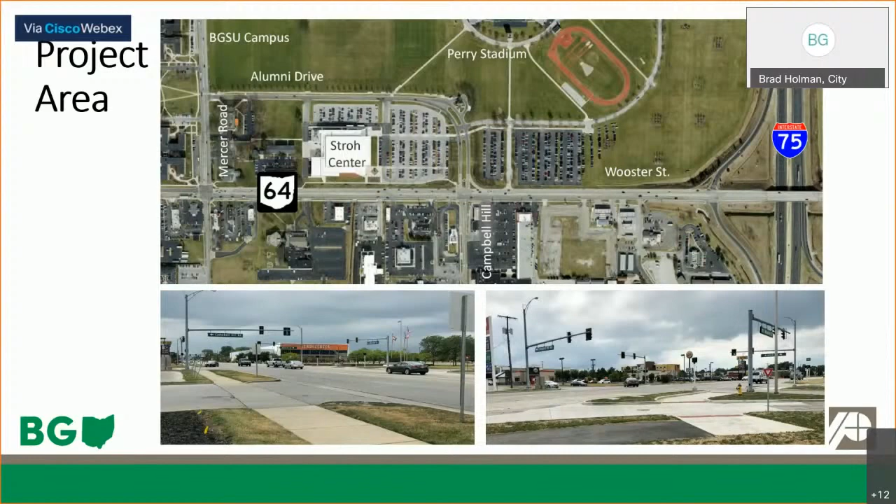This is a project overview. This is actually the third phase of work originating from a 2015 Wooster Street corridor study, which planned to create a safer corridor with improved pedestrian connectivity, safer vehicular access management, improved decorative lighting, and landscaping improvements. It's really the front porch enhancement concept that the City of Bowling Green and BGSU have been talking about for about 5 years. The pedestrian hybrid beacon near the Stroh Center and the I-75 ramp roundabouts were the first and second phases. In this project, a new landscape median provides an enhanced gateway into the City of Bowling Green and BGSU while controlling the driveway access.

We have many driveways on the south side of East Wooster. The new roundabout at the intersection of Wooster, Campbell Hill, and Alumni Drive provides the U-turns needed for the access changes.

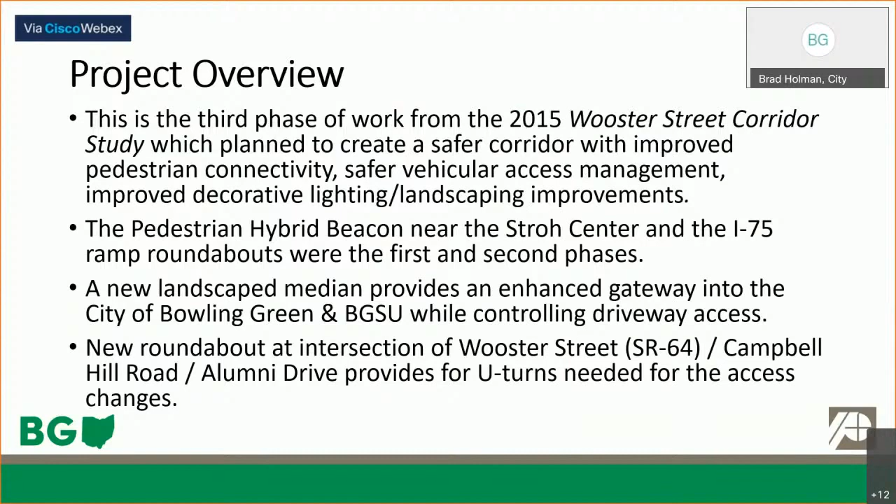In this view, you can see the concept drawing from 2015. In that concept, the median was grass and bushes. We're going to have cobblestone pavers, trees, and decorative street lighting. It complements what we have up on the overpass. This was first displayed back in 2015.

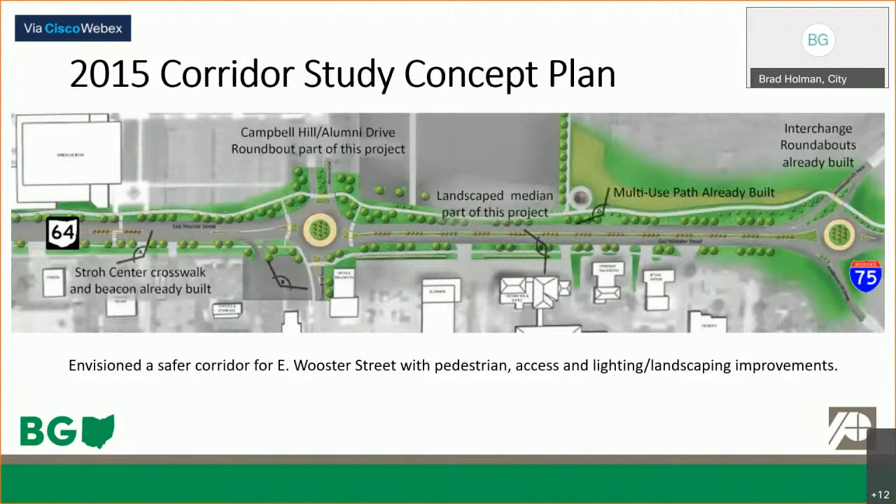A little bit tighter view, especially on the right, is the intersection under review. Here's the concept drawing from 2015, which kind of got us to where we're at today.

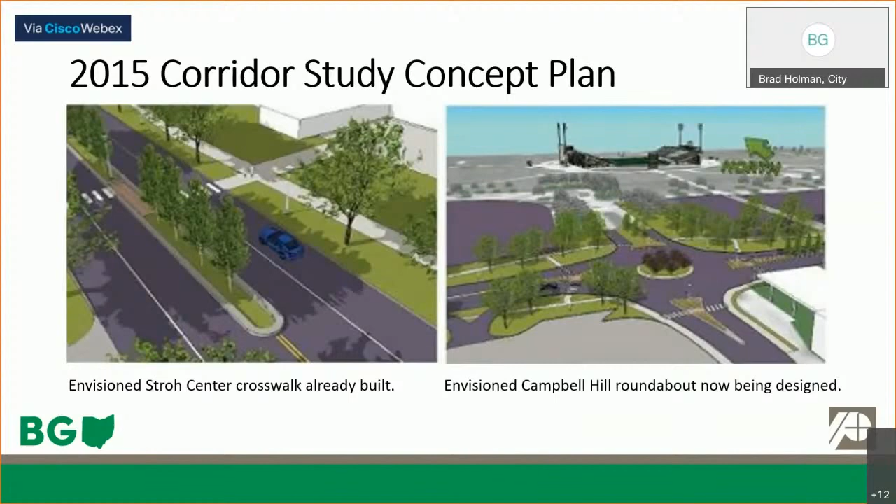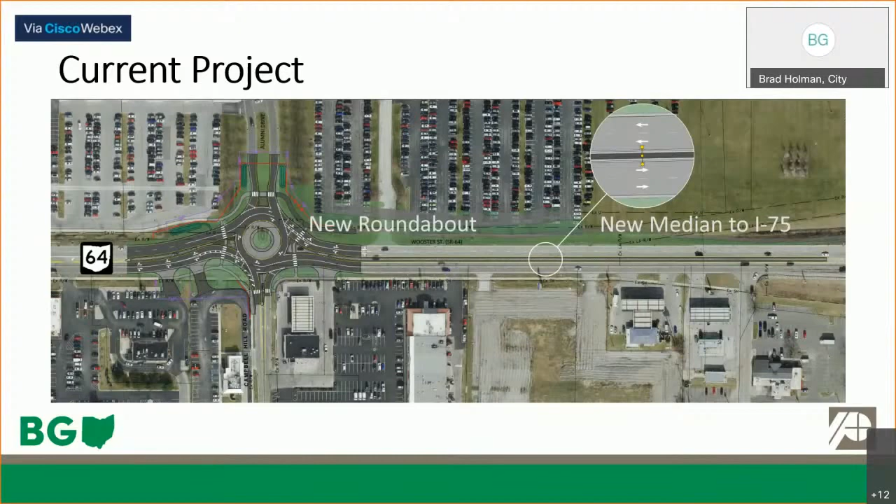Here's a closer look at the roundabout. It's a two-lane roundabout. You also can see the new median heading up towards I-75, and the driveways on the south side. Alumni Drive to the north and Campbell Hill Road to the south are both one-lane roads. East Wooster is two-lane, currently with a center median.

Here's an even closer look at the roundabout. Again, the two lanes on East Wooster, the single lanes for the cross streets. The easy U-turns will allow the replacement of left turns across through traffic.

This concept gives us pedestrian movement on all four sides of the intersection. We currently only have three ways of getting across the intersection today. This roundabout will operate at speeds of about 15 to 20 miles an hour, much like the roundabouts that exist up on the overpass. Aesthetic improvements, again, are the stone pavers, decorative lighting, and landscaping.

Here's the median overview, and again close-up shots of those elements: the pavers, the lighting, the plantings, and landscaping. The new median runs all the way from Campbell Hill to I-75, and again eliminates those left turn crossings through traffic.

Now I'm going to turn it over to Brad Holman, the city engineer, and he's going to take it on from here.

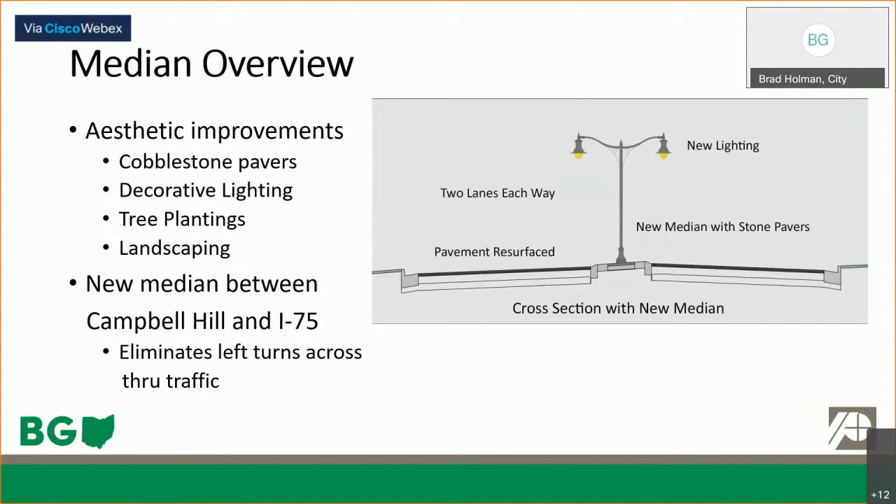Thanks, Brian. Next, I'm going to go over the project impacts that you'll notice. First off, you'll notice there will be some access changes, not only during construction, but also after the roundabout and median island are put in service.

There will be a need for some temporary and permanent right-of-way, and the majority of that will come from the north half of the intersection where BGSU is. There's very minimal environmental impacts, but there will be an addition of some bioretention cells or rain gardens implemented for the treatment of stormwater runoff in this area.

And then finally, I'll go over the maintenance of traffic in more detail in the next few slides. In general, Wooster Street will remain open with one lane of traffic in each direction for the duration of the project, but there will be some possible night closures for final pavement restoration.

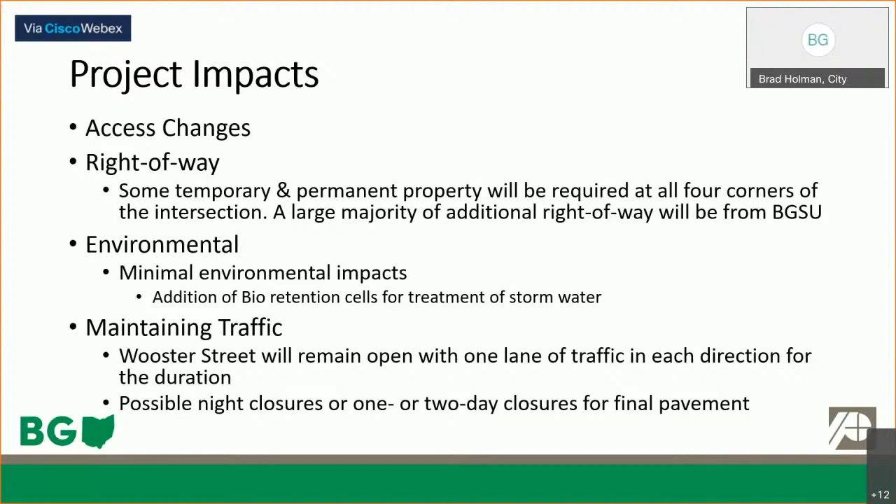For the maintenance of traffic, you can pretty much divide it into three phases. During phase 1, Alumni Drive will be closed for 60 days. During phase 2, Alumni Drive and Campbell Hill will both be closed for 30 days. And then in phase 3, the roundabout is actually completed, but the center median island construction will take place during this phase.

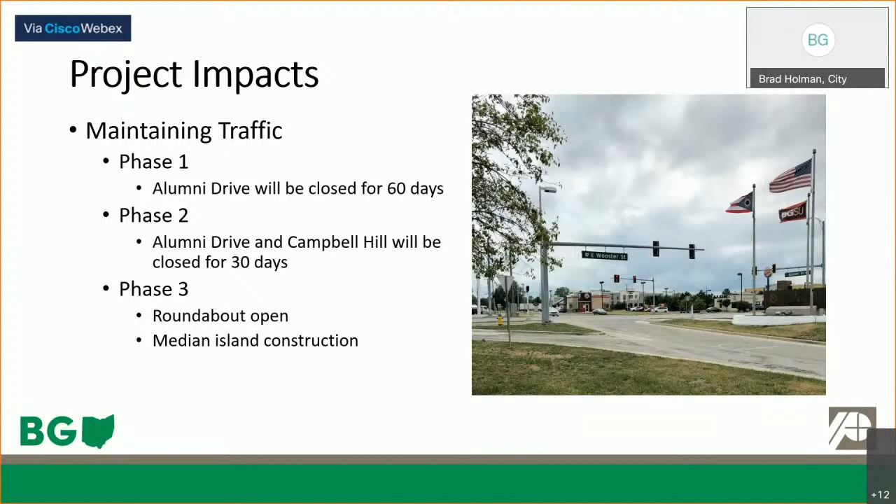Here's an illustration of what phase 1 will look like. Traffic will be shifted to the south half of Wooster, shown here in blue, maintaining one lane of traffic in each direction, and Campbell Hill will also remain open during this time. A temporary traffic signal will be installed on the south half of the intersection to control the flow of traffic on Wooster and Campbell Hill.

On the north half of the intersection, shown in orange here, that's where construction will take place during phase 1. About two-thirds of the roundabout will be constructed during this phase, and Alumni Drive will be closed, as well as the sidewalks and multi-use path on the north side of Wooster. Pedestrians will be shifted to the south half of the intersection to avoid the construction zone.

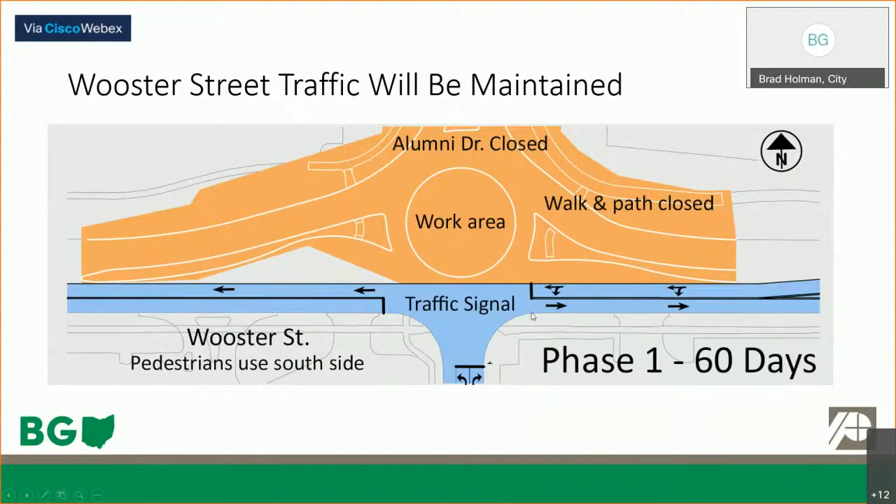During phase 2, traffic will be shifted to the north half of the intersection, and work will take place in the south half. On Wooster Street, the traffic area shown in blue will actually utilize a portion of the new roundabout with one lane of traffic in each direction. Alumni Drive will still be closed during this time, and pedestrians will be shifted to the north side of Wooster.

Work will take place in the area shown in orange here on the south half of the intersection, and Campbell Hill will be closed during this phase, with the walks and driveways also closed while they're being constructed.

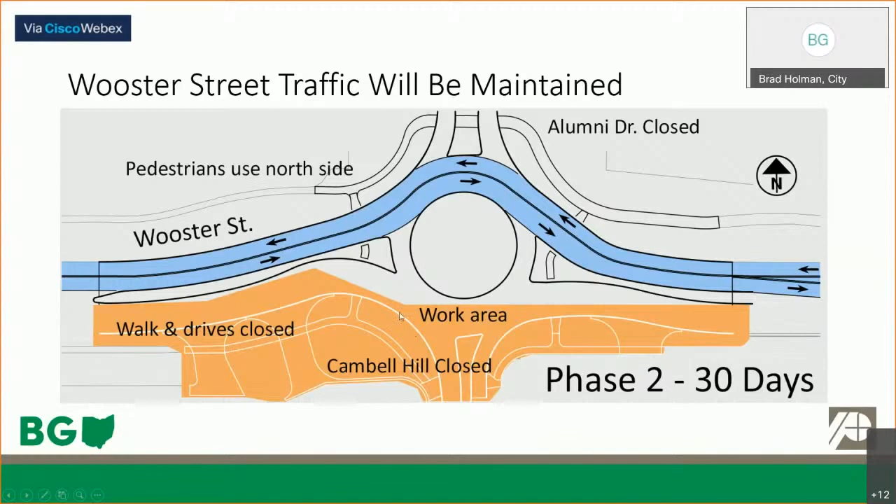Once we enter phase 3, the roundabout is actually completed, and one lane of the roundabout will be put into service. Traffic on Wooster Street will be shifted to the outside lanes while work on the median island takes place on the center lanes, which will have the decorative lighting and trees that Brian was talking about.

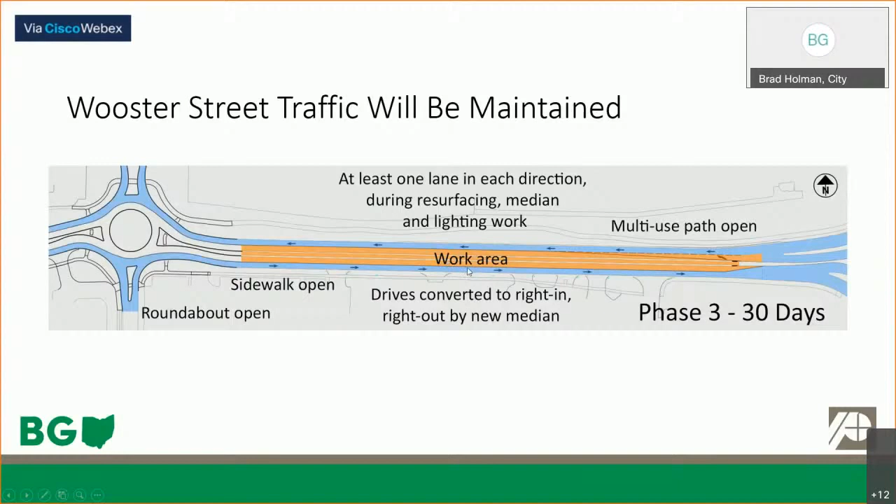Once the median island is constructed, it will convert all the driveways on the south half of the corridor to right in, right out. You'll have to utilize the roundabouts on either end of the corridor, the I-75 roundabout on one side, or the newly constructed Campbell Hill roundabout, to get where you need to go. This median island will prevent or eliminate the dangerous left-hand turns occurring into and out of these businesses now.

Next, I'm going to go over a little bit of the project schedule. Currently, Poggemeyer Design Group is involved in detail design, and they'll be for another year or so. In July of 2021, the environmental documents are expected to be approved. During spring and summer of 2022, all the right-of-way is expected to be acquired, with the majority on the BGSU side of the intersection. Finally, construction is expected to take place in summer of 2023, lasting around 4 months, probably from Memorial Day to Labor Day.

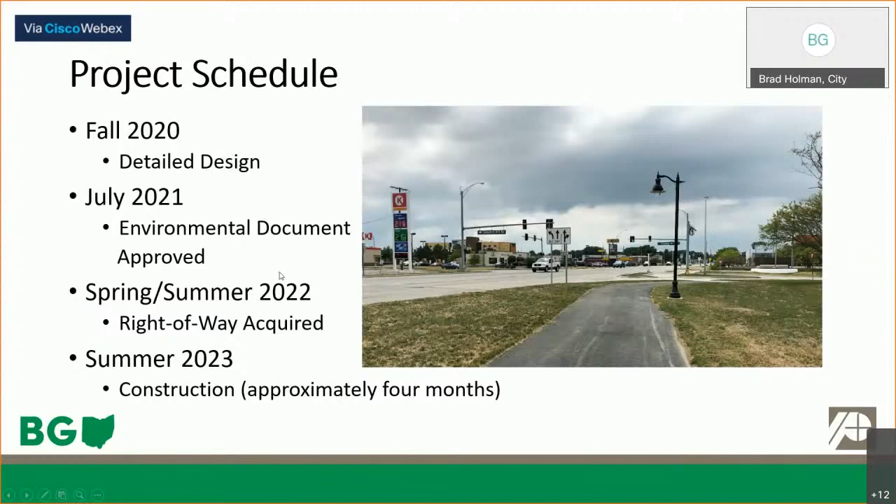I'd also like to play a short video about multi-lane roundabouts, and I'll go ahead and get that fired up now.

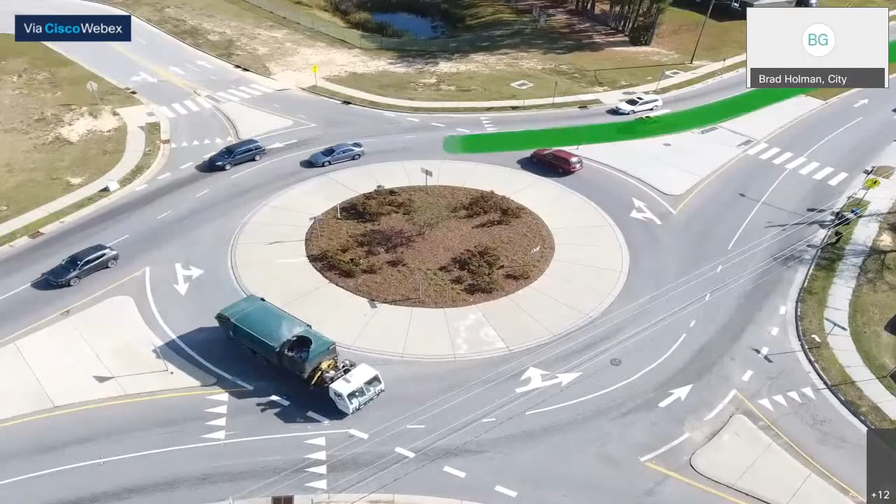The multi-lane roundabout is designed to safely handle more traffic at busier crossroads and allow more vehicles to pass through the circular intersection at the same time. Navigating a multi-lane roundabout is simple once you understand what the signs and pavement markings mean. As you approach the intersection, signs and roadway markings guide you into which lane you should use before entering. Typically, the outer lane is for drivers who want to exit at the first or second junction. The inner lane is for drivers who want to exit at the second or third junction, or to make a complete U-turn.

Drivers must stay in their lanes as they continue through the roundabout. The use of two lanes at the multi-lane roundabout allows drivers in both lanes to enter at the same time when there is a safe opening. This keeps traffic moving, creating fewer delays, and the intersection operates more efficiently.

Drivers must yield to any vehicles already inside the roundabout. Drivers should always use their turn signals when exiting. Pedestrians must always use the marked crosswalks at each approach outside the roundabout, and drivers always yield to pedestrians. Bicyclists should enter the roundabout as any other vehicle would, and drivers should yield to any bicyclist already inside. With these simple rules in mind, navigating a roundabout will be a smoother and safer experience.

To learn more, search Roundabout at ncdot.gov.

That's all I had for my part of the presentation, and I'll turn it back over to ODOT. Thanks, Brad, for the presentation and the great video about roundabouts there, Brad.

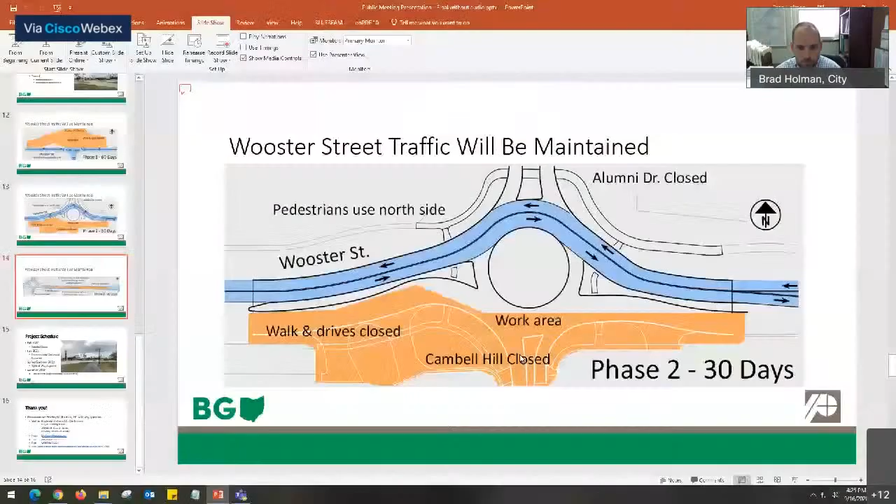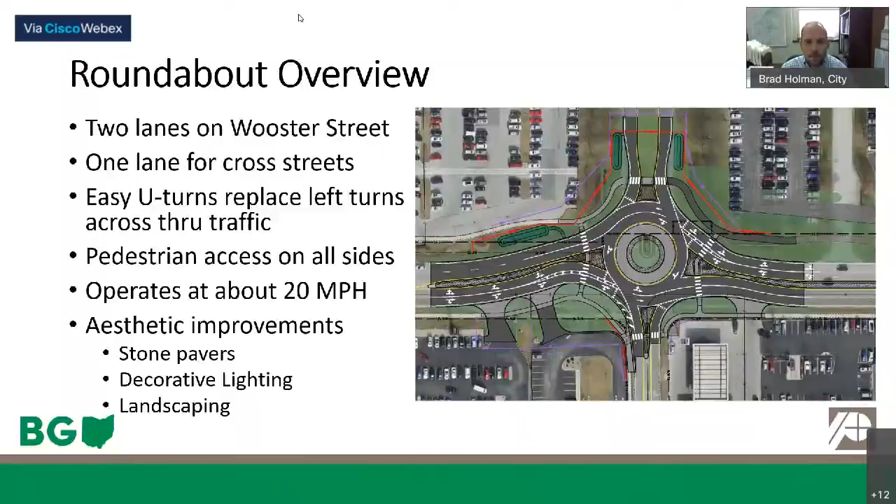And would one of you by chance have interest in discussing how bicycles can go through a roundabout in this location?

This location on East Wooster has the luxury of having the multi-use path. That's there so people can walk, ride their bike, jog, or whatever if they don't feel comfortable riding on East Wooster. But if you're going to ride a bike through the roundabout, as the video showed, just go in and own the lane. Bikes may use the full lane all across the city. The bike can go through the roundabout just like a vehicle can. Speeds are 15 to 20 miles an hour, so they're slow. Just follow the rules you do anywhere else when you ride throughout the city or on a road or highway, and you'll be just fine with the slow speeds through this roundabout.

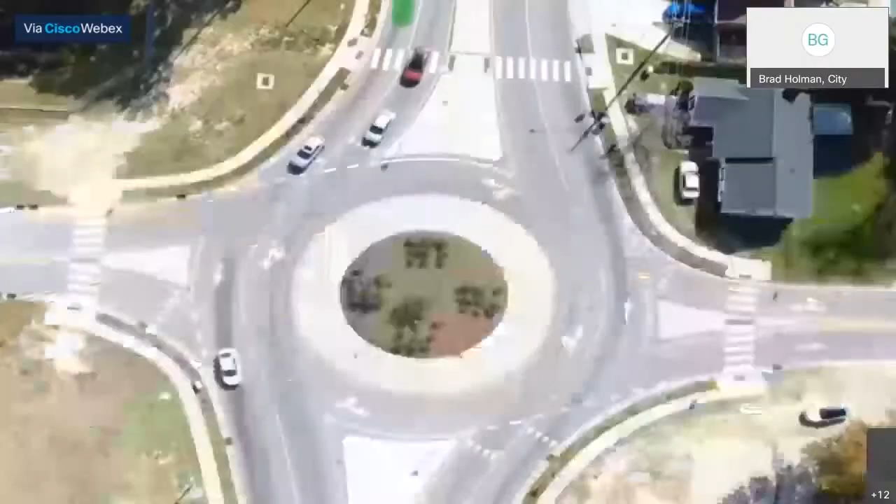Navigating a multi-lane roundabout is simple once you understand what the signs and pavement markings mean. As you approach the intersection, the signs and roadway markings will guide you into which lane you should use before entering the roundabout. Typically, the outer lane is for drivers who want to exit at the first or second junction. The inner lane is for drivers who want to exit at the second or third junction, or to make a complete U-turn.

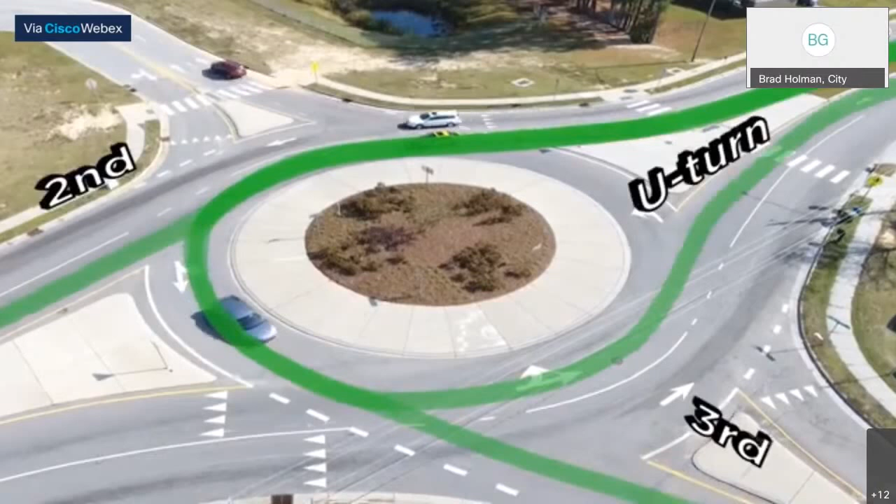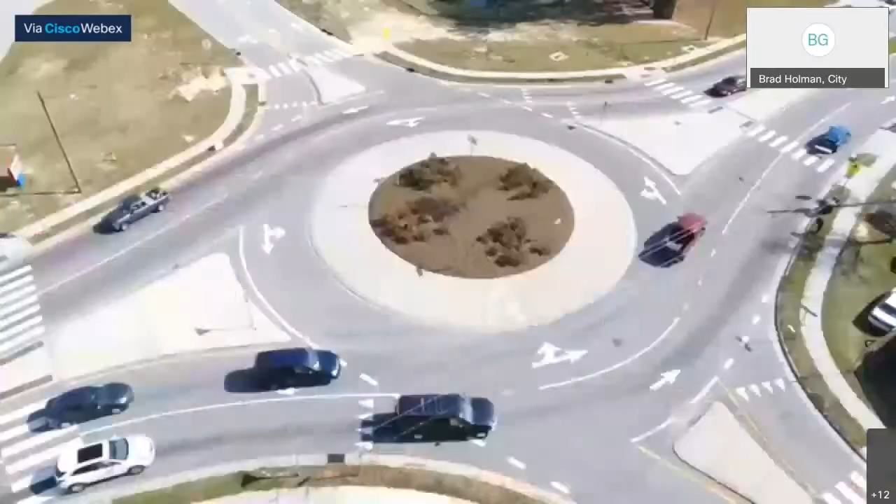Drivers must stay in their lanes as they continue through the roundabout. The use of two lanes at the multi-lane roundabout allows drivers in both lanes to enter at the same time when there is a safe opening. This keeps traffic moving, creates fewer delays, and the intersection operates more efficiently.

Drivers must yield to any vehicles already inside the roundabout. Drivers should always use their turn signals when exiting. Pedestrians must always use the marked crosswalks at each approach outside the roundabout, and drivers always yield to pedestrians. Bicyclists should enter the roundabout as any other vehicle would, and drivers should yield to any bicyclist already inside. With these simple rules in mind, navigating a roundabout will be a smoother and safer experience.

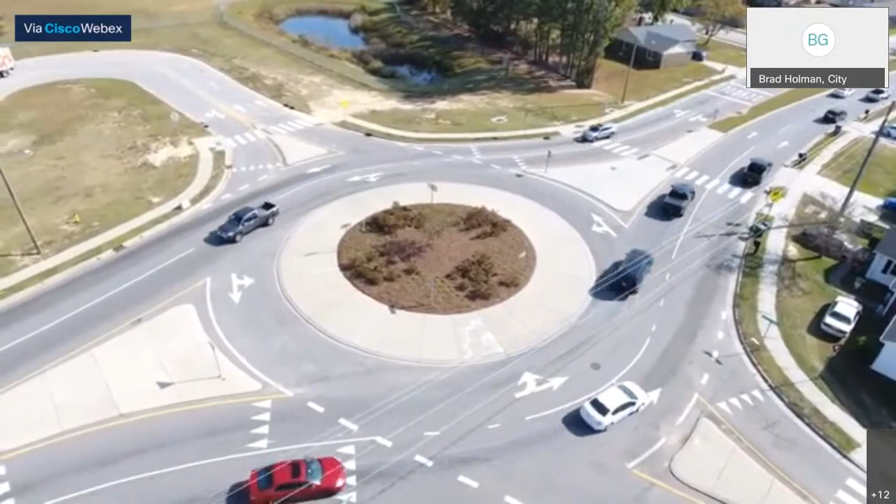To learn more, search Roundabout at ncdot.gov.